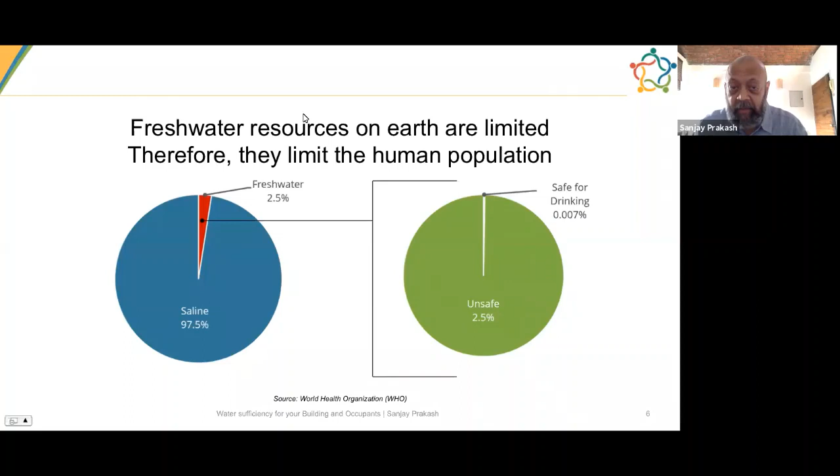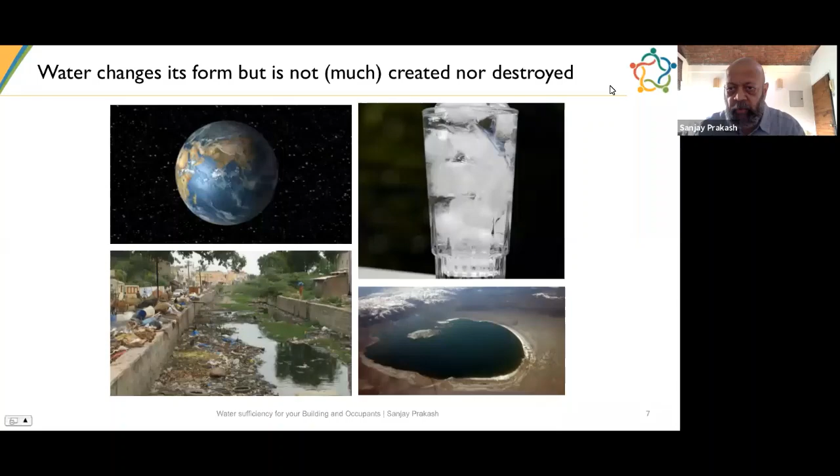The other property of water, unlike energy, or like energy, is that it changes form, but is not created nor destroyed. So it can change state, such as this ice glass you see here that's frozen, and it's there in the water vapor as well. And it can change its quality, its degree of purity as well. So, for example, you can have wastewater, and you can have a pristine pond. So you can have all kinds of water available, and most of it remains pretty much constant in the Earth's crust. It's not really created nor destroyed, it just changes form, it changes purity, it changes state. So this is the important thing about water.

If you blow up the fresh water figures, you see that most of it is locked in glaciers and ice caps, nearly 70%, and some 30% is in groundwater. So actually what we see as surface and other fresh water, rivers and lakes, is just 1.2% of that 2.5% which is fresh water on earth. And if you blow up that 1.2% also, you find that the bulk of it is in ground ice and permafrost, so it's not actually available. Ground ice is not counted in groundwater, but it can be. That's a question of definition.

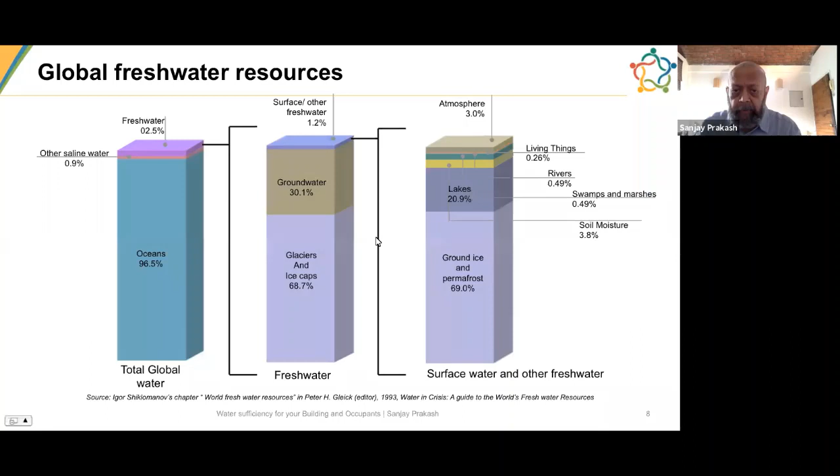Water has a geostrategic or geopolitical importance as well. For example, one of the largest rivers in Asia, the Brahmaputra and the Indus, start from pretty much the same area in China, and cross over into India in the area of Spiti. In a sense, you could say China holds the tap to India, and India in turn holds the tap to the Indus, which feeds Pakistan mainly nowadays.

And yet this is not to say that the tap can be turned off easily, because a variety of treaties, including the Indus Waters Treaty signed in 1960, have ensured that we can't really turn the tap off on Pakistan in terms of the Indus.

Also, it's impractical to turn the taps off. What would turning taps off mean? It would mean creating a huge lake on our side, large enough that all the water of the Indus continues to always be stored on this side of the border. That's not practical, neither for China nor for India. So we actually don't do it. Even during the wars we have been engaged in with Pakistan, we have never really tried to shut off the tap, as it were.

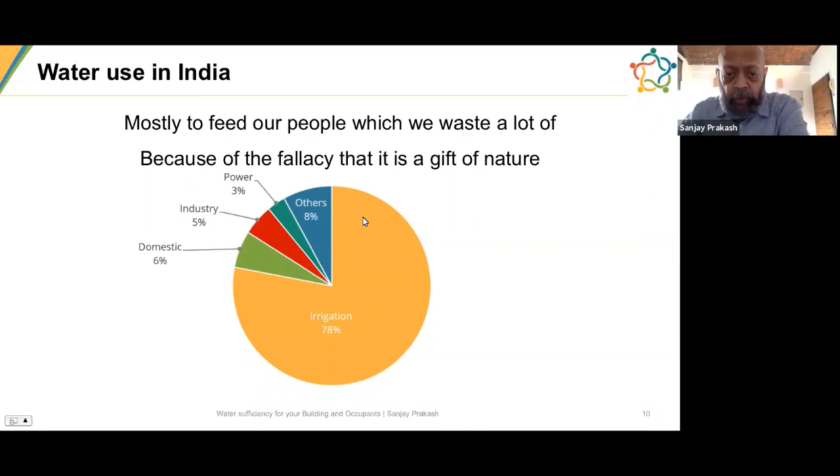is not as important as food choices are. And we actually don't understand how climate change will affect all this availability. We are saying, okay, we have a limit of 10 billion people on this earth. Will climate change cause rain to fall more often? The answer by most scientists is yes, more intensely, and therefore water will run off and not collect. The answer seems to again be yes. Will there be a greater number of droughts? The answer is again yes. So how do we reconcile these difficulties is something I would rather leave to you to find out, because the answers are complex and contradictory. It's not easy to say how climate change will affect all this availability of water, except to generally say that water scarcity will only tend to increase rather than decrease.

I have used the term groundwater. I would like to change the term now to say it's fossil water. Why is it fossil water? Because like fossil energy, coal and oil, it is stored in the ground over long periods of time. And when we draw it using pumps, we don't necessarily take our endowment of this year's water or this season's water. The only renewable water really is rain or snow, all kinds of precipitation. And therefore, if we really want to be strict about net zero water, we should be talking about only renewable water and not really fossil water.

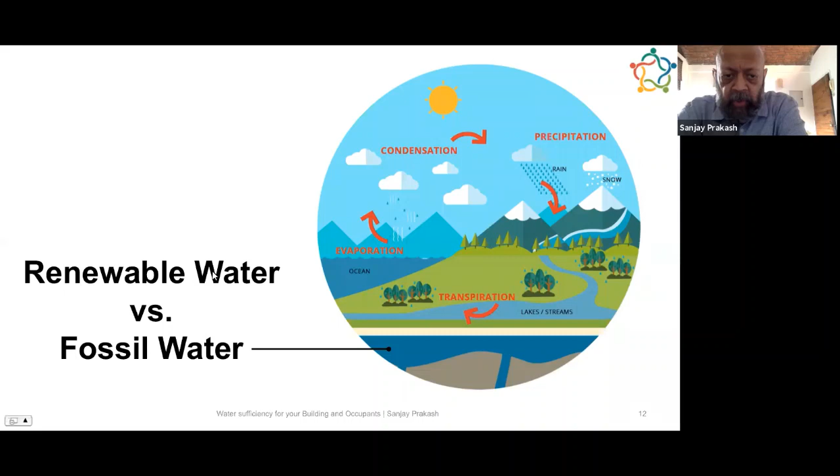Now let's come to the use side. What is the standard of use that we are supposed to be using in our domestic use. Remember, the grand total amount of fresh water used in India translates to 1600 liters per person per day. Of that, only 135 liters is used domestically, or should be. Often this 135 liters is not available. Therefore, most countries, especially most cities, especially in the north, get less than this.

So now you see, of the 135 liters, 30-40% gets into leaks. Of the remaining part, another 6 to 8% goes into post-distribution leaks. So the actual usage in urban areas is 75 to 115 liters, and this is how it's distributed: 29% drinking and so on and so forth. You can just read the whole chart. And you see how this doesn't all require the same quality. Clearly drinking requires, let's say, WHO standard water, but laundry doesn't necessarily require the same degree. Washing utensils similarly may not require the same degree.

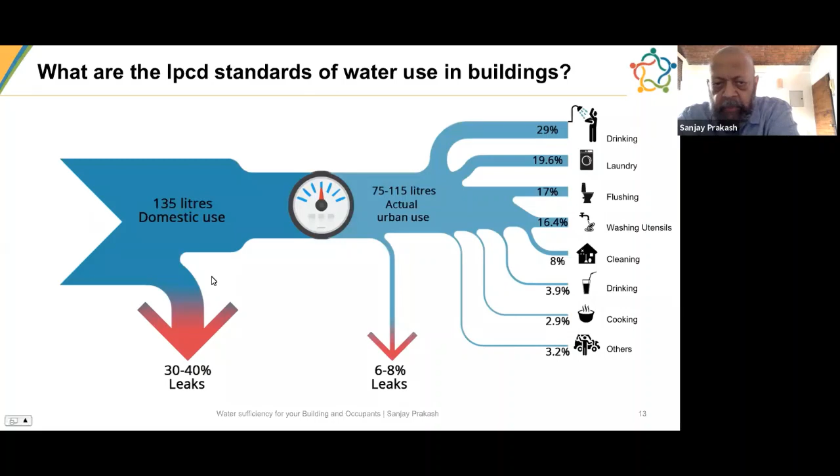And I've also discovered that some water engineers have done something quite interesting. They wash with dirtier water and they do a final rinse with clean water. So that's another way of fooling this quality parameter and getting there.

Now these are the various classes of water classified by CPCB, the Central Pollution Control Board, where class A is drinking water, class B is outdoor bathing in an organized way, class C is drinking water source after conventional treatment and disinfection, class D is propagation of wildlife and fisheries, which is different, and class E is irrigation, industrial cooling, controlled waste disposal, etc. In fact, class E can often just be treated sewage water, because each of these classes, as you can see, creates a waste stream.

So we tend to use class A water in our domestic supply pipelines in our cities. And that, to my mind, is a problem, because it means we are using the same quality of water that is drinkable as well as for flushing, which seems to me like a class C or class D usage. But anyway, this is the tradition, handed down to us, I think, from Western societies which developed cities in the 20th century. And we must remember that most Western societies are highly water positive.

In the Netherlands, for example, or in the US, water supply issues were generally sorted out in the early part of the 20th century or even the late 19th century, with projects like the Tennessee Valley Authority being big time suppliers of water. They generally don't consider water a big issue. This is one reason why in India we haven't considered water such a big issue, probably because we ape the West. Unfortunately, it's today become a political hotbed because you can't even start costing water for what its worth without creating a political upheaval, because people consider water a free gift of nature, and even farmers who use most of the water would completely rebel if water was priced.

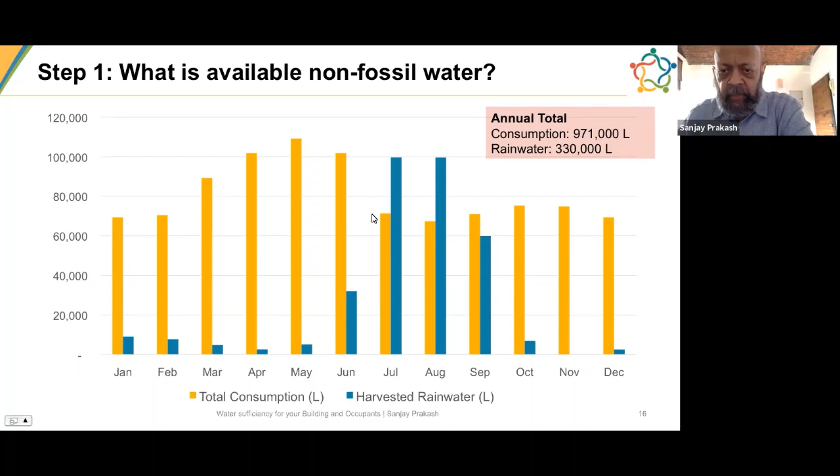Then the second step is to reduce the amount of water we use, at least domestically, not just with vegetarianism, which is of course one possibility, but you can't really assume that in your Decathlon project. You'll have to assume some kind of average food habit, whatever that means. But you can reduce it with efficient fixtures.

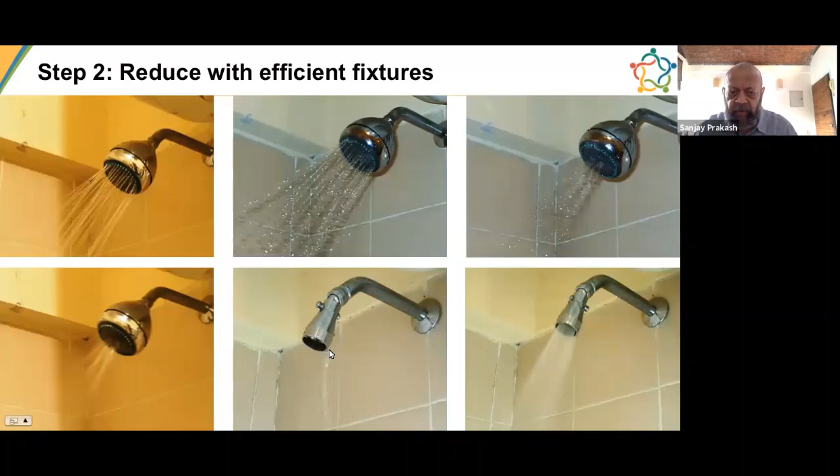Even with your eyes closed, you push this little button in, and the water reduces to a dribble so you can still do soaping, about 200 milliliters per minute. So you get much less for those few minutes you're doing the soaping. You can actually reduce even from 2.8 liters for a while. I found that using this, we could not use more than 10, 15, 20 liters in a shower, while the normal usage pattern is 30, 40 liters for a typical person.

So here is my analysis and bar charts of what I found. I did this very simply using a stopwatch and a Bisleri bottle of 1 liter to find out how many seconds it took to fill 1 liter. These 2 bars you see in groups are with an aerator, with partial opening and full opening, so every faucet has 2 settings. The soaping setting is 400 GPM, not 200 as I said, I was wrong. This is that set of thoughts that you can read at your leisure, and I think these will be available to you in the form of videos.

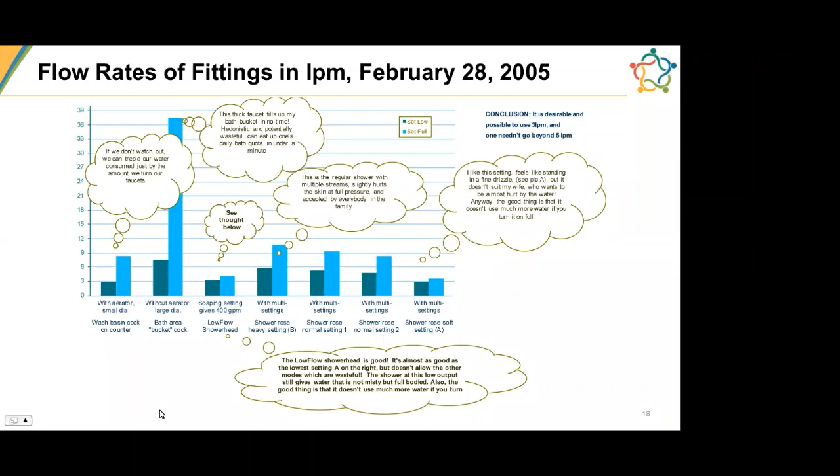So in that case, I suggest you have a look at the thoughts that came up while this bar chart was being made.

This was set low, set full, and I discovered that in the bath area that I had in the apartments, there's a horrible 38 or 37 liters of water that flowed in every minute when I set it to full. Though, when it was set to less than full, it was as little as 7 liters per minute.

That means in 1 minute, you could end up using your entire day's endowment of water. Later on, I figured the reason for this was that this was a master bedroom, and the designer must have thought people would fit a tub in it. Of course, tubs don't get easily filled up because they're 200-300 liters, and you don't want to wait more than 10 minutes to fill it up.

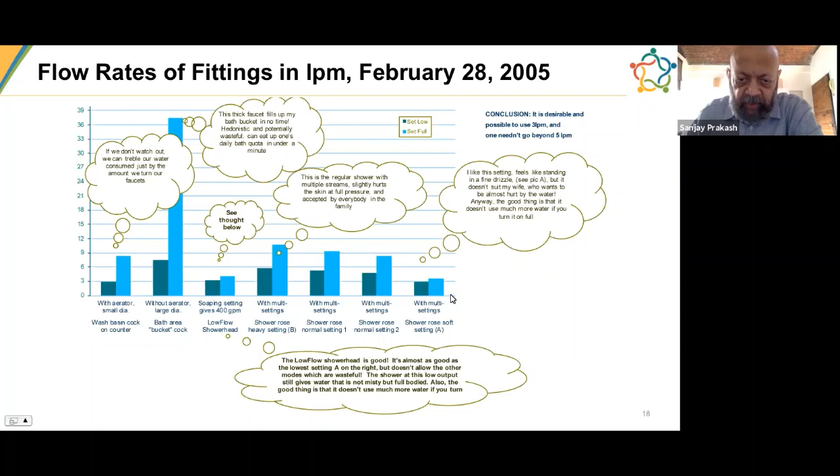So something like 37 liters per minute is what is required to fill a tub properly. That made me realize I should not desire a tub in my new house, and I did not have one. We used low flow showers only, and this was the result of the other shower settings you can have a look at.

The third step, having established some reduced use of renewable water, is to reuse that water within the network. This is a diagram from a project that we did in Bangalore.

This shows that there is rain and it comes to four places. One is the soft roofs, the roof gardens. One is the hard roof where it flows off and gets collected into a rain-fed tank. The third part goes to the sky garden, which was a special feature in that project. Then the open landscape area, it falls on, so this goes to the recharge pits and finally to the ground.

So everything later on is stored in the shallow aquifer and can be pumped back up into an underground tank, and from there it was treated and so on. If you spend enough time on this diagram, broadly rainwater was used in this project to provide most of the water, sometimes from the ground, but mostly straight away from stored rainfall harvested water, which was a very large tank.

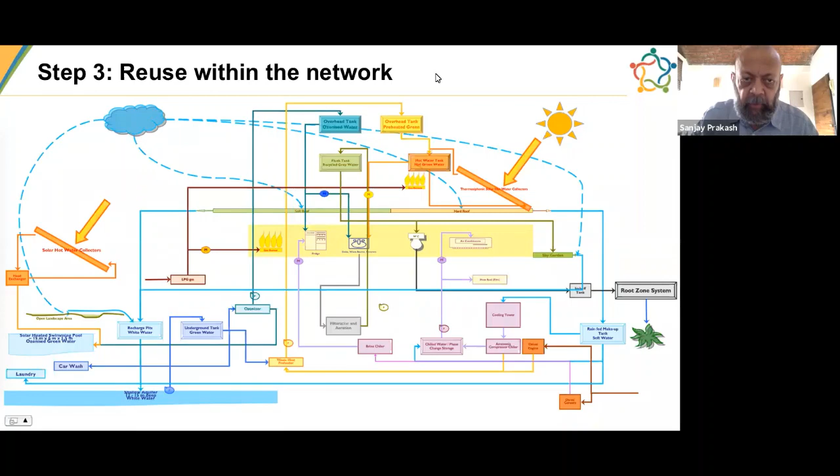I'm sorry that arrow is not very clear, but it was also used for cooling towers for the central air conditioning in that project. I think part of it was sent for flushing also, but I don't remember too well now, it was many years ago. So you see it is possible to reuse this water within the network quite strongly.

How do you treat it? So I showed you already something called a root zone system, which I was running ahead of my story.

There are two sorts of treatment systems in water. This would be called electromechanical treatment systems, that is, they run on some degree of pumps and other mechanical devices. The bulk of sewage treatment, which contains pathogens, is accomplished by aeration. You have to get sufficient air into the mix for the pathogens to be oxidized away and for the water to become clean enough so that it can be considered disinfected or good for other uses.

This is 2 methods out of 4 that we have illustrated, the most common being activated sludge on top, where you have an agitator and a set of pipes inside a large tank, which bubbles air from outside into the mass. Before and after, you can have some settling, and in all these systems the sludge comes out.

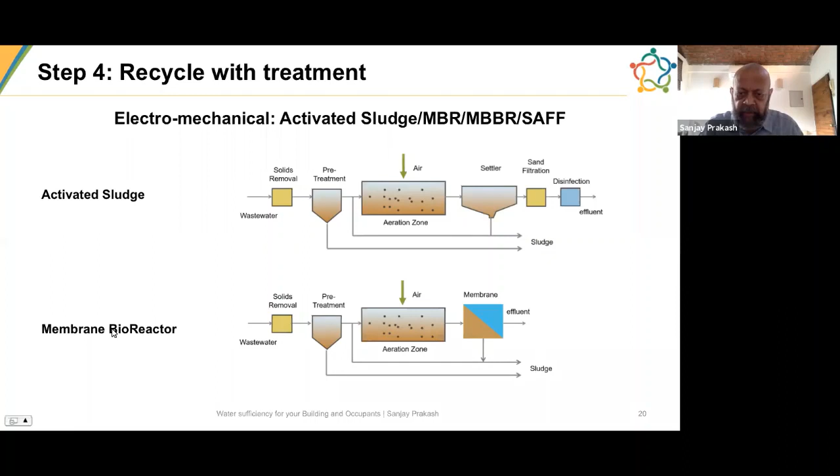Then there are natural systems, or nearly natural systems. The most common natural system, evolved in Germany, in Bremen, is called the Decentralized Wastewater Treatment system, or DEWATS. This was invented when they discovered that most traditional electromechanical sewage treatment systems in our cities were not functioning. They found some 96% or so not functioning.

The reason for that is simple: India is short of energy and electricity. So it is easiest for politicians to stop the aeration in the sewage treatment plant and supply that electricity to houses instead, because it fetches more votes. So you're stuck with a situation where sewage treatment plants, which were electromechanical, well designed, in place, maybe even well maintained in some cases, were not working. Often the reason given was that there's no electricity coming at this point, even though other lights were working.

Then there could be, oh, this was working till this morning, but it's not working right now because something's gone wrong with it. So they figured out the real reason it's not working is that we need a non-electrical system. And this is exactly what was designed by them.

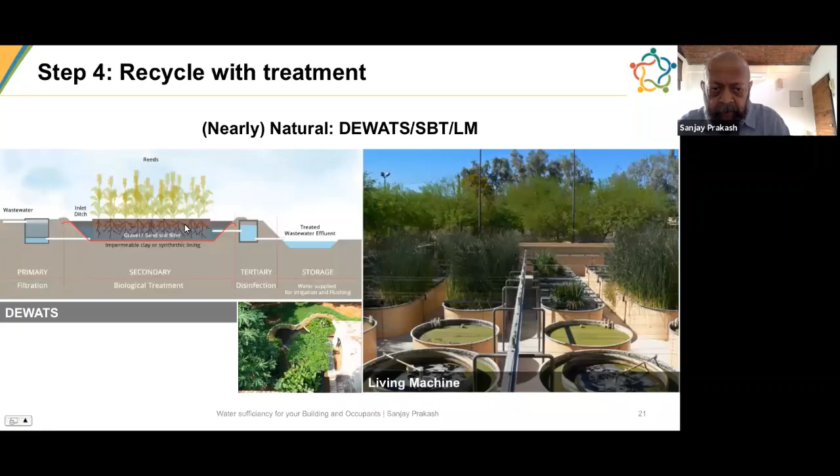Now, this is regarding recycling, but what about usage for irrigation? That itself can be dramatically reduced. The common method is the sprinkler system, which requires a lot of irrigation. We measure irrigation in terms of equivalent rain per day, where each millimeter represents 1 liter per square meter.

Sprinkler systems typically provide 5-6 liters per square meter per day, while subsoil irrigation can use zero in that sense—you clear up the grey water and pump it, or push it by gravity, into pipes so that you just moisten the subsoil. This is exposed in the photograph right now, but soil will cover it, so it will simply get wet.

That can also be accomplished similarly with drip irrigation, which does consume some water, but minuscule amounts by comparison—as little as 0.5 mm per square meter, or half a liter per square meter. It supplies droplets of water to the root of the plant, not to the whole area.

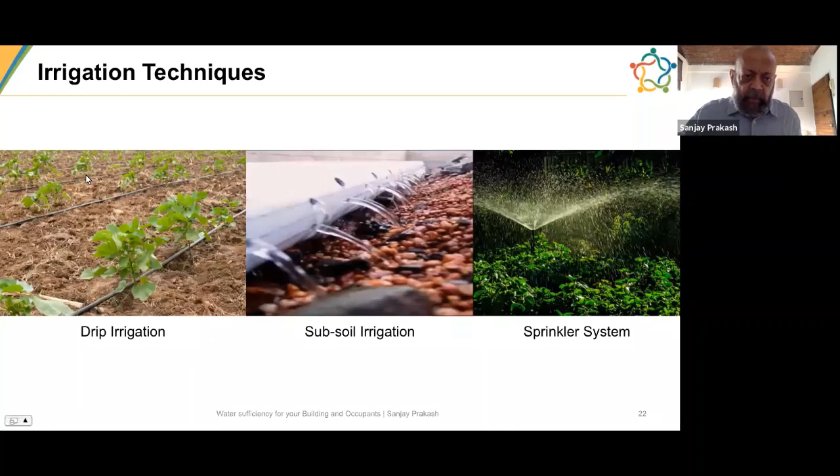Of course, this is useless for grasses—for those we use sprinkler systems or subsoil irrigation—but it's very useful for herbs and individual plants. You can also go in for xeriscaping your site. In fact, this is a technique I use quite often. Xeriscaping is simply designing something that doesn't require any irrigation at all, or almost none.

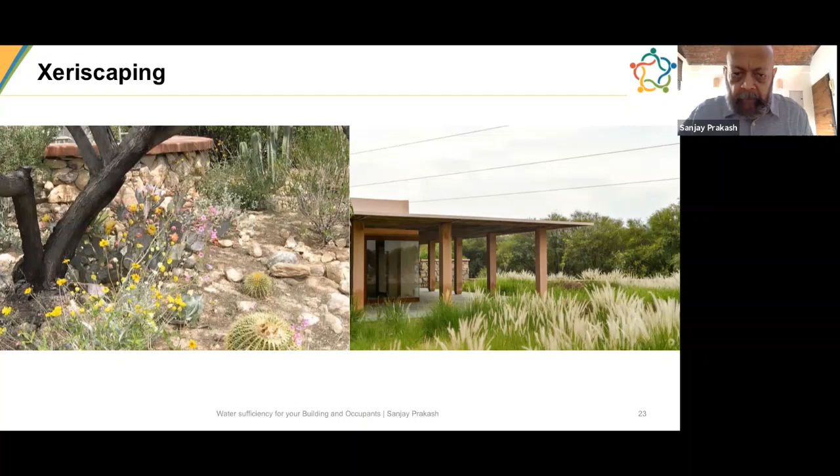I wanted to end with two case studies. One is Agilent Manesar. This is a method of computing what you can do with rainfall.

Typically the method is that you set up July to June, because July is the month in which you can say for sure that you have excess water availability, since it's a monsoon month. So you put down the rainfall you expect on average. You can get this from Wikipedia or from various other weather files on the internet. And then you see how much you can catch.

Here is the rainfall analysis on top. This is from the sky garden, this is the amount we have caught, 40%. This is from the hard roofs, 80%. This is from the soft podia, hard podia, and so on. So in a project you had so many square meters and so much runoff.

Of course, the not-utilized portion should try to be as little as possible, but sometimes it's not possible to have 0 square meters as not utilized. So here you get a rough estimation of what kind of contribution can be given by these methods.

For example, in this particular project, 40% is contributed by the hard areas on ground. That means you have to really ensure that these are kept clean. In this particular project, we even made sure these were cleaned once a day by the workmen manning this office space, because this water would be useful to collect, and it's the biggest source.

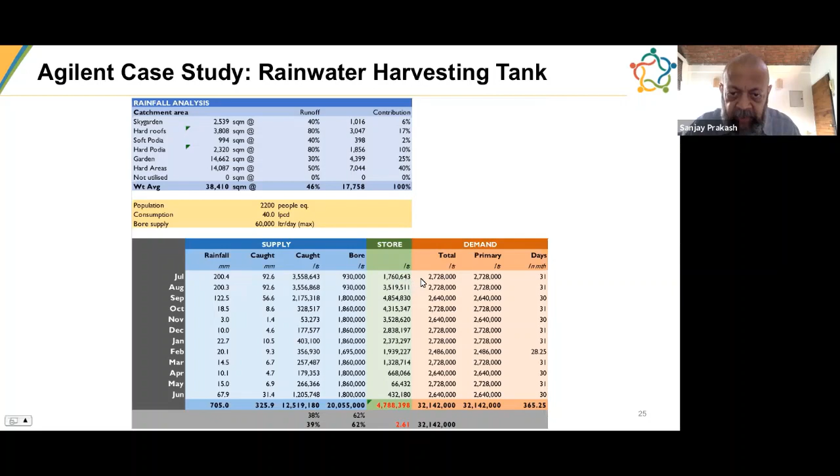In this case, it is 5 million liters, 4.788 million liters. And the largest number of this is the amount you need to store, because that's when you will get so much on that month, September, and later on you will get a reduction. This has to tie up with next month's plus and minuses to reach so much. So you get various ways of storing this rainwater.

So here we identified 4 types of uses: washing, flushing, mechanical, which mainly consisted of 2 kinds, STPs and air conditioning cooling towers, because we used cooling towers in this project since they are much more energy efficient than air cooled compressors, 40-50% more efficient.

And then there is irrigation. Mechanical is one more thing, it's car washing in this case, because a lot of people would use cars, coming in from Gurgaon. This is a project in Manesar, and they would have drivers wash the cars over the period of the day. So we wanted to cater for that because that was a real demand.

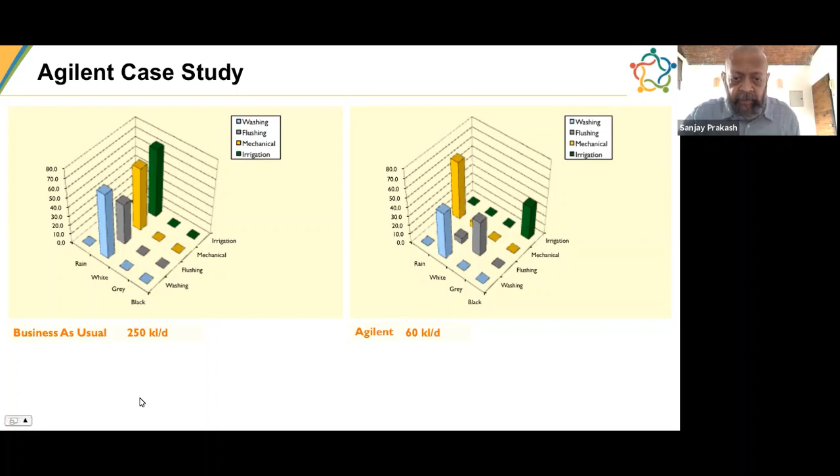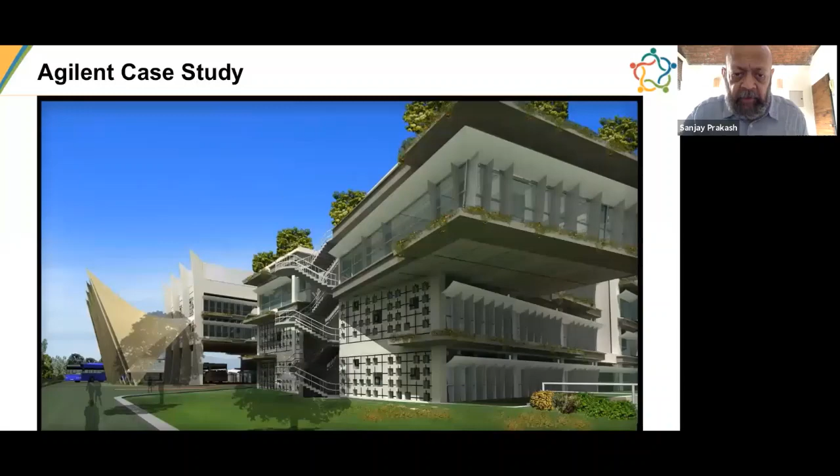This was some quick views of this building that had 1,800 people, and instead of 250 kiloliters, we are using 60 kiloliters a day for the last 15-20 years.

And so, in a sense, they are eating their own shit, but of course they are not really eating their own shit. It's been tested and treated for the right quality before being used for irrigation, but it is part of the cycle of water in this particular project. This is an overall view of the project.

The second case I want to cover is IIT Jodhpur, which is in a sense more complicated but very similar to the earlier diagram I showed you, where rainwater is a major feed. We computed that it falls on various areas in different ways and finally either goes into the sky or into the subsoil aquifer. This was a dark area, which meant we could not use it to tap groundwater.

CGWB has identified that this is so water short and it's a desert-like area that we cannot use any water pumped out of the ground. So our strategy then was to, over the decades, maybe 20, 30 years, keep on harvesting every drop of rain into the ground so that it would start growing plants.

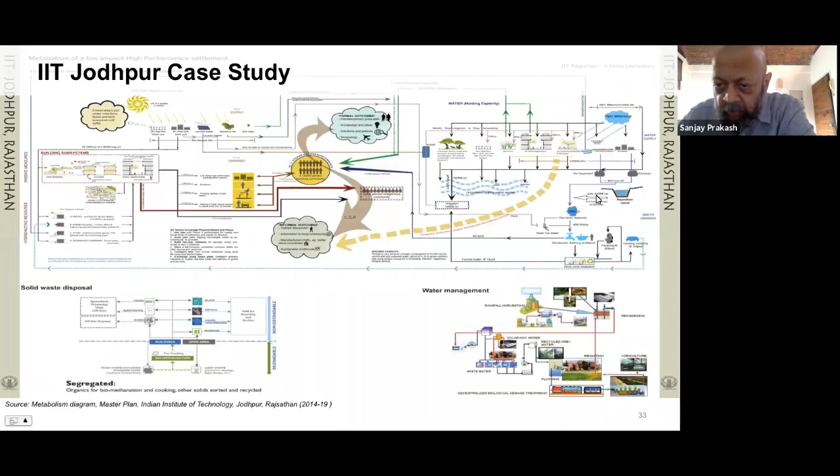Now, this is the external input that we had. We had a Rajasthan canal feed, which would feed so much per year - up to 500 megaliters per year, million liters per year. This could be used from the Rajasthan canal, which is quite far away, actually 20, 25 kilometers away. So there was a feeder specially created for IIT Jodhpur.

But our aim was to try and make this almost zero. So even though you could establish the campus, we wanted to, over a period of time, reduce the use of this to near zero.

That was the whole purpose of this entire process, in which we created a whole system of how much irrigation, how much xeriscaping, how much we could collect from the solar collectors, because solar collectors also have glass and then it's easy to harvest. There was also drip irrigation used, and we also used dew harvesting.

Dew harvesting is an interesting technique used often in deserts, where early morning you can catch the dew, especially when there are plants, which evaporates from the ground through evapotranspiration, and that can be caught in little nets which capture the dew and it becomes practically distilled water which you can use.

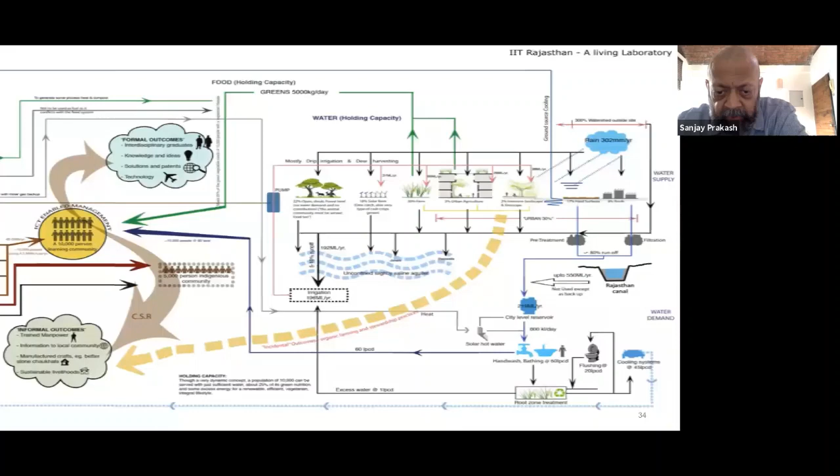This was the water cycle. You can see the rainfall harvesting on various buildings, and it had various bases for recharging. It went into air conditioning also, and basically it went into domestic use. All these domestic uses are there.

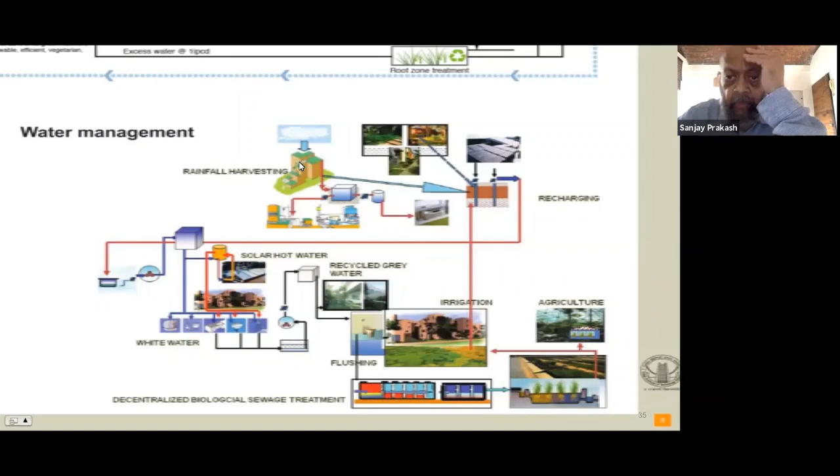Then from this it went into a simple kind of recycling plant, which was not a sewage recycling plant, but it recycled grey water, which would be used to create flushing quality water. And then flushing quality water would be recycled with a DEWATS system, or decentralized biological sewage treatment, and then used for irrigation and agriculture, and also cooling towers, which I don't know whether it's illustrated here or not. So that was the idea.

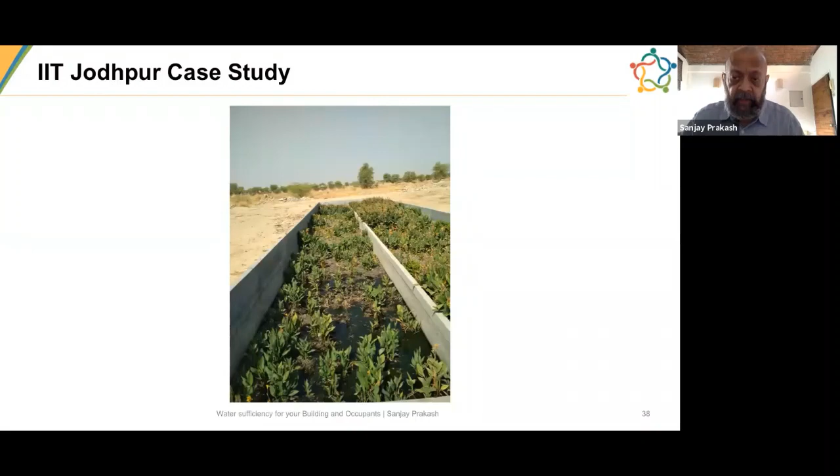DEWATS systems are very space intensive, that's really the only thing they require. They don't require energy, but they require a huge amount of space, as large as 2 square meters per person. Considering we have 10 square meters per person as a working rough approximation for offices and homes, you can see that 2 square meters is a very large proportion of that space. So that's its primary problem, that it requires campus-like spaces.

The effluent from this DEWATS system goes towards making swales. Swales are nothing but natural waterways, in this case they were created. You can see here the kind of soil that existed 5 years ago. What the swale does is it creates obstructions in the path of water flowing down, and therefore water goes into the soil. Once water goes into the soil, moisture and texture improves and plants can grow.

Here are some plants that are beginning to grow in the swale, and now it's much greener than it was when this picture was taken 4 or 5 years ago.

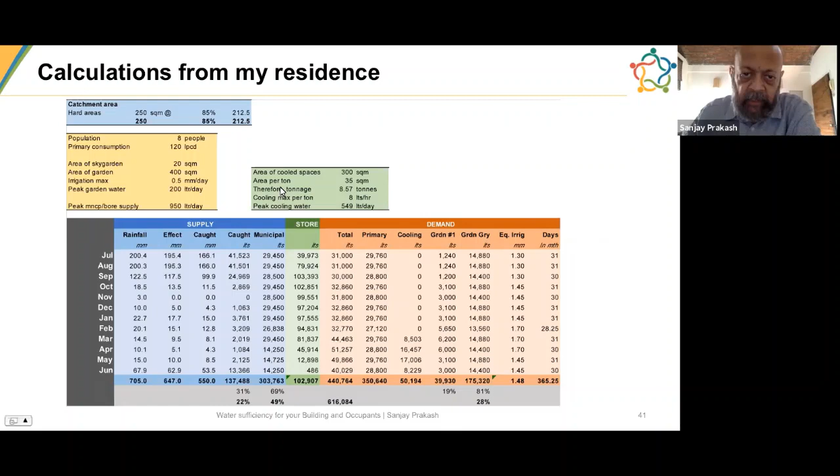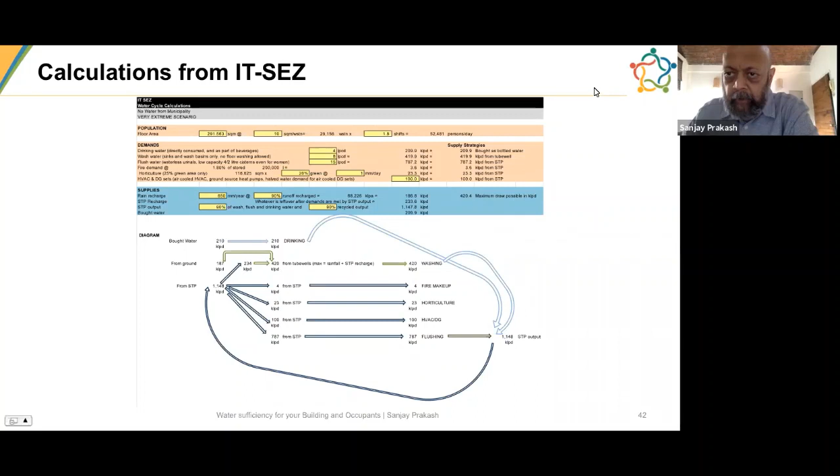So here are some other areas and calculations on the same sheet in various ways. This is the last calculation I'd like you to visit with me in the form of an Excel sheet, which I'll open and take you through. Let me escape from here, close this, and open the worksheet.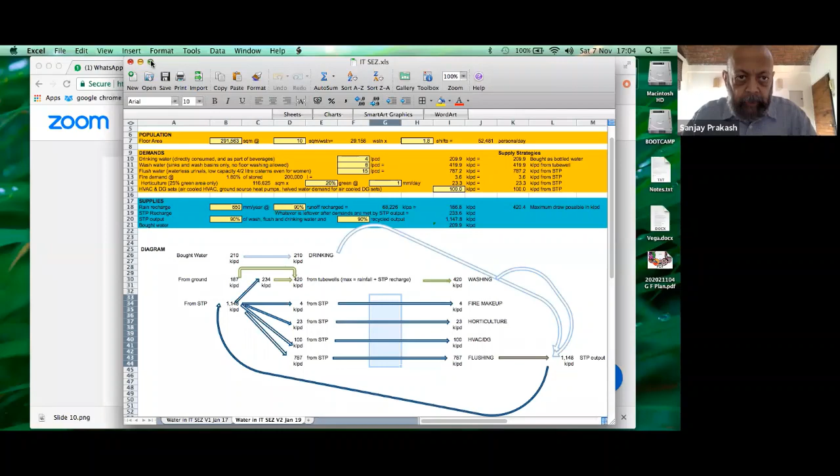So here's the same worksheet now in a more live form, to demonstrate what we did to reach this point. We had a project with so much square meter of area, 2.5 was the FAR, I think, on 30 acres. Unfortunately, with so much area given to IT parks, it means there are many people working - nearly 30,000 people. Since they would work in shifts, we figured we would require water for 52,500 people or thereabouts per day.

So we said 4 liters they'll drink as coffee, tea or water. 8 liters for washing, with no floor washing allowed, only sweeping and vacuum cleaners. And an extreme low quantity for 2-liter cisterns for flushing. So we figured we could manage with 15 liters, 8 liters and 4 liters, which totals to some 25 liters or thereabouts - 27 liters per day instead of 45 liters per day, which is the normal National Building Code standard.

This translates, when multiplied by 52,481, to so many kiloliters per day, so many kiloliters per day, and so many kiloliters per day.

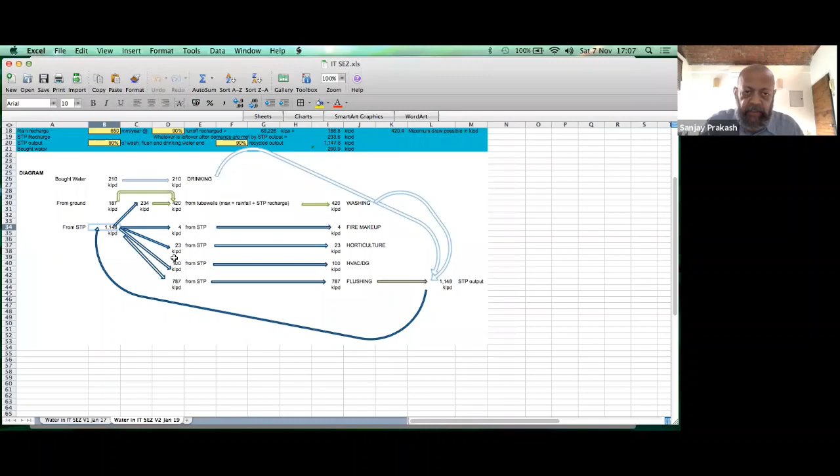And so every time we would balance this, we would have to use different strategies to get this worksheet to balance. This is something that I recommend to the organizers to be given to you as a worksheet, as well as, of course, this whole seminar will be given to you in the form of a recording. So you can have a look.

And basically, it meant that from the ground we took 187, and from STP we actually this went to the ground because we said we will recharge 234 kiloliters per day STP water, which is extra, because even when we took the fire makeup water, horticulture water, HVAC water, and flushing water, which we had to play with on those upper parts to get these right, then we still were left with 234 kiloliters per day extra, which we would recharge into the ground. Therefore, we could then draw 187 plus 234, that is 420 kiloliters per day for our washing, which is what we wanted.

So you can see that these figures are not fudged that way, but they are backward calculated and forward calculated so that they balance out. And that is the whole game of how you manage your worksheet and how you go back and forth, because you do one trial, you don't get a balance, then you go back and so on.

And we figured that we wanted to give 1 millimeter per day because the client did not want a Xeriscape type of landscape. So we said with 1 millimeter per day, and then more in the monsoon, you can manage a somewhat herbaceous garden, so that's fine. But no lawns, of course, very few lawns, maybe 10% lawns and so on.

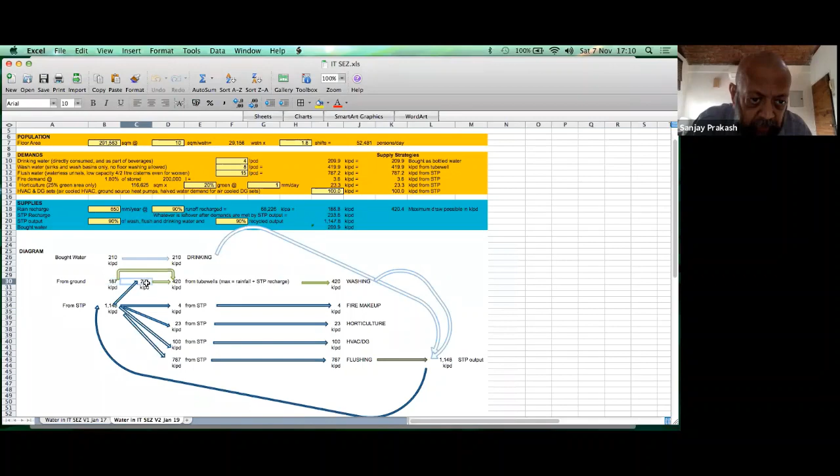And then we draw 187, and this 187 has to be less than 234, right? That's the key point. So the maximum draw possible has to be the total amount of the recharge water plus the rainwater. See, 187 was the amount of rain that fell. Here it is, rain recharge, which was, we tried to make it 100% as much as possible, 90% runoff recharge. Rain recharge, even at 650 mm, was turning out to be 187.

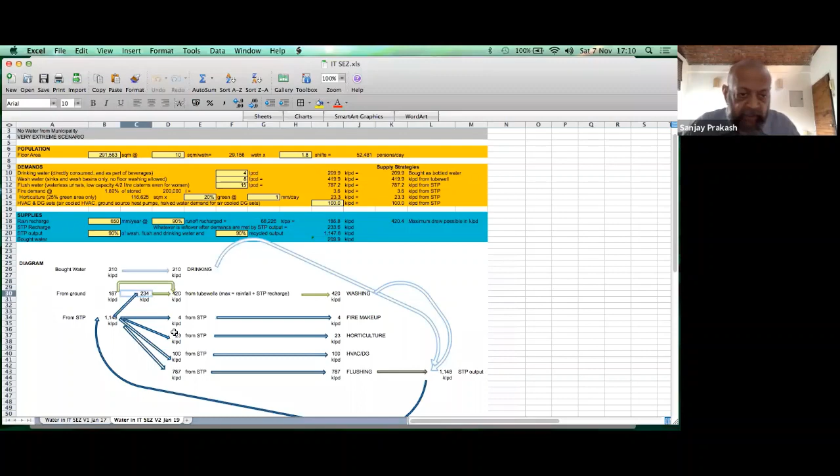So we could draw 187 from the ground, and 234 agreed that we would be drawing in dry seasons more water than fell as rain for that day, but we would be drawing much less in the monsoon where it would be getting recharged. So this is how we balanced it to a near zero or a zero water regime.

But it still meant, in this case, because of the 50,000 people that we had to cater to, that we still had to get 210 kiloliters per day, which is a very large amount. It's like 50-60 trucks of water, 70 trucks of water from outside. So we had to buy it.

So we actually started, because this is a very large SEZ project, we started working out a train of trucks to be brought from the Yamuna, the Ganga Canal, from near Meerut, where we found a source of water that is available. But this project didn't come about, so we don't know whether it would have worked or not. However, this was to just give you a flavor of how this whole business of net zero goes when you actually get your hands dirty and start working out the computations.

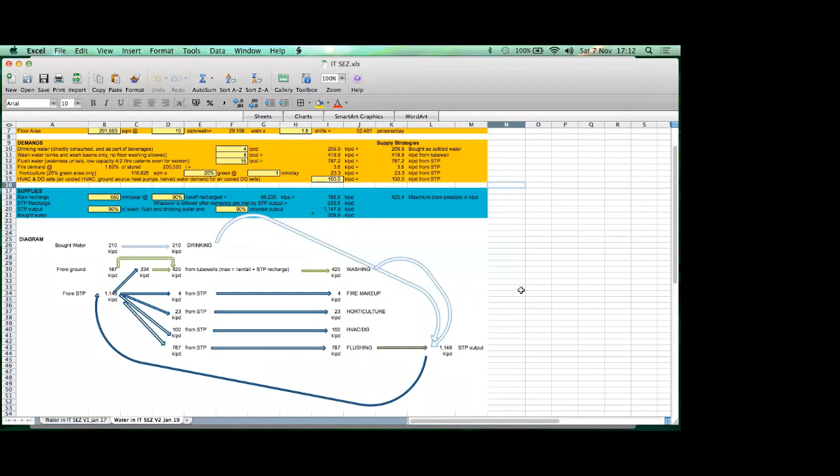The first question is how to take into account permeable concrete used in hardscapes in the water budget equation. Well, you'll have to find out from the manufacturers what the permeability is. There's another trick I didn't mention: I often take out 5% of rainfall every month from water balance calculations, not because it's a drought year, but because when surfaces receive rain, the first sporadic bits that fall don't run off, they just get absorbed. So to be conservative, I take about 5% of rainfall every month. There's no real science behind this, it's just judgment. Frankly, even the question of how much permeable concrete recharges the ground depends on whether the manufacturer is giving an honest opinion, a calibrated test report, or just marketing spiel.

Next question: does the DEWATS system work in extremely cold climates? Yes, in fact DEWATS works quite well in northern Germany, though in extreme cold climates like Sweden they put in solar heated water or other heated water to make it work. By the way, the living machine system doesn't work in cold climates at all, because it depends on mollusks and living creatures to create aeration, so it stops working when plant growth or animal culture isn't possible. But DEWATS generally works because the plants are fairly hardy - Cannas is the most common plant used. Its only real problems are not maintenance, heat or cold, but that it gets oversaturated in the monsoon and requires a good gardener, and that it requires much more space than electromechanical systems. Electromechanical systems occupy about 100 square meters and handle large volumes, but DEWATS requires 2 square meters per person.

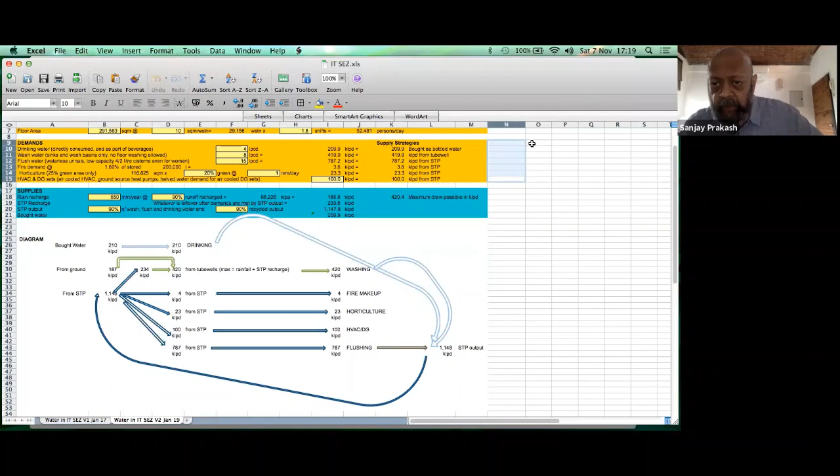The best disposal, of course, is to put it on soil, because one of the biggest things modern society does is separate us from our farmland. Traditional societies used to keep us close to our farm, which meant that the night soil we created, which was nutrients, would return to the soil directly or indirectly - either through animals or directly as night soil onto the field. But in today's system, as soon as we have sewage and WC, we create sewage which belongs to the fields, but it doesn't go back to the field.

This is actually the primary reason why we have floods and droughts. In the monsoon, we see so many parts of our country have a lot of erosion, and so many parts have floods. The reason is that by taking away nutrients from the soil and not returning them to those fields, we screw up the whole nutrient balance of our soils, and the soils no longer have the soil moisture required to not erode - so they erode in rain. The second thing is that cities put out a lot of their sewage, often untreated, into the rivers, and this causes a lot of siltation and flooding as well. These are two reasons modern society has seemingly invented, which are not necessarily the best way to go. This is one reason why a good net zero water regime would also help solve some of these side problems.

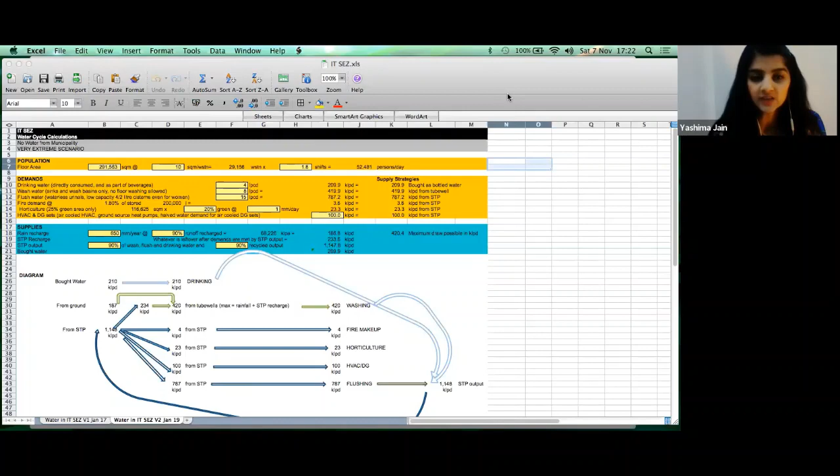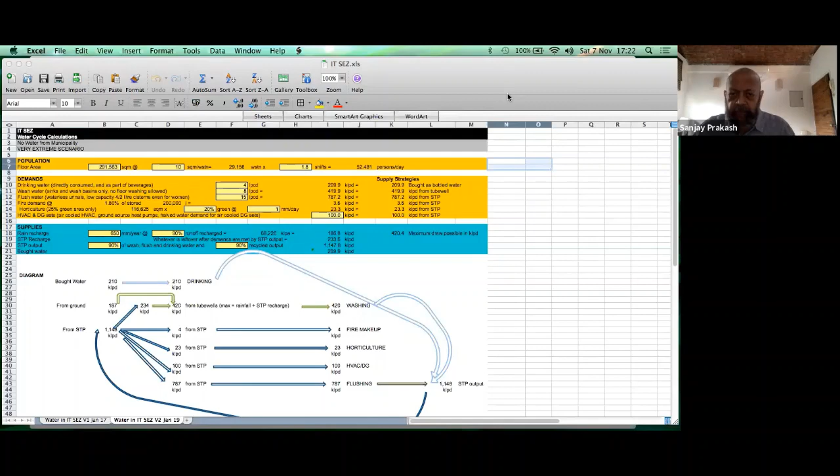Another question about the DEWATS system: what area is required for DEWATS in terms of wastewater produced in liters per day? The same amount that you would put in, right? For example, the way to calculate a DEWATS area is as follows: you take the total quantity of sewage you're putting in, which you can compute from your water consumption calculations, and you hold it for a depth of say 20 or 30 centimeters over 30 days. That's the area you require. You can divide the whole volume by 0.2 meters or 0.3 meters and get the area you require for the plant bed filter, because it has to be held for about 30 days to make it reasonably clear. I hope that answers your question.

How is it feasible to give a water pond at the end of a root zone system in a residential project? That I have to leave to you. Often if you don't have space, you can't easily give it. You will have to depend upon more energy intensive methods like AquaGuard, for example, an ultraviolet radiation machine, or ozonization, which is relatively cheaper for large volumes and not very energy intensive, but takes some energy to produce from air. It produces ozone and bubbles it into the water. So disinfection, you will agree, is necessary for producing drinking water, but how you do it, through a pond or any other way, is finally up to you.

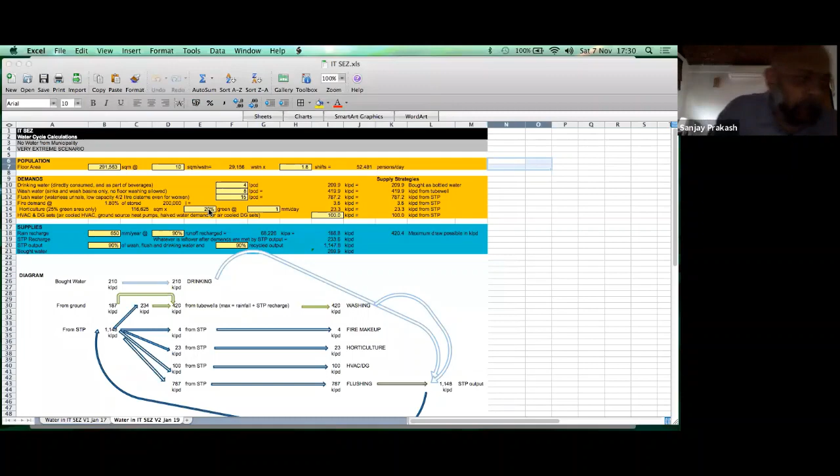This brings me to an interesting story from Germany. You might be aware that in Germany, people pay as much for their water as they pay for electricity and gas for heating. The reason is that they made a simple law requiring Germans to pay for wasted water at the same rate, essentially paying to treat wastewater to the same quality as the water they're supplied. So whatever it costs, the municipalities are supposed to charge that much. Naturally this is a very large charge, and therefore the drinking water quality in Germany is very good. The municipalities charge the same amount as if the sewage and wastewater were to be treated to drinking water quality.

Next question. What are the plants used for aeration in DEWATS and SBT systems? The most common ones are called cannas - plants which have rhizomous roots that can aerate at the root level. I'll leave you to do your own research to find out what else there are. There are quite a large number of plants, I believe, which can do this.

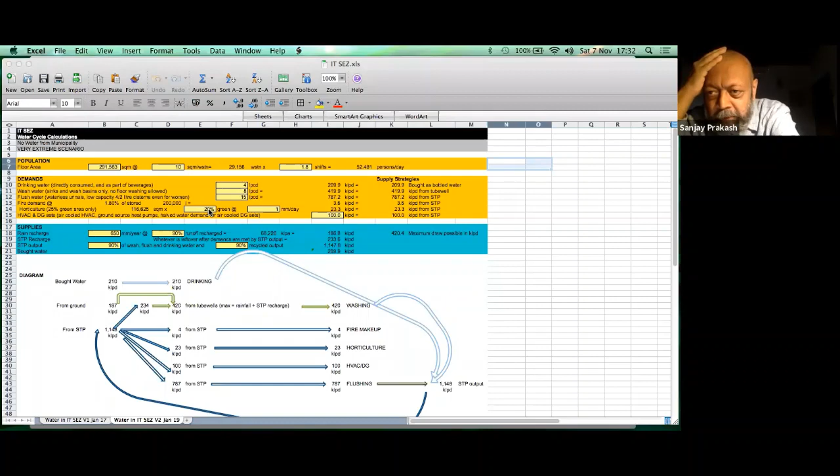Next question. If we have a sewage treatment plant at a slightly higher level on site, is there any other technique to collect it in the STP rather than pumping? I can't imagine anything - please enlighten me if you can. I don't see how water can flow from a lower level to an upper level. Basically, sewage is mostly water - 99.9% is water, only 0.1% is sludge.

Next question. Let's take this one up. What should be the water management system when there is too much rainfall annually and the groundwater table is high, but we cannot dispose of the water off-site to accomplish net zero characteristics? This is an unusual case because you're saying you actually have too much water. You will have to find some interesting ways of dealing with it, including evaporating it, though if there's so much water it's likely a very humid climate, so not much will evaporate. I really have no answer to this one.

Following that, we had this other question: if we choose to store water, won't storage also be a big issue? How much space would a 1 lakh liter water storage tank take up? My 1 lakh liter storage tank in the backyard takes up a space of 6 meters by 6 meters by 5 meters deep - that's more than 100 cubic meters if you multiply those numbers, but the rest is taken up by the lining on the walls and so forth. Its roof, which is the important component, is supported with piers of brick every 2 meters, so that I could create the roof out of stone and not concrete.

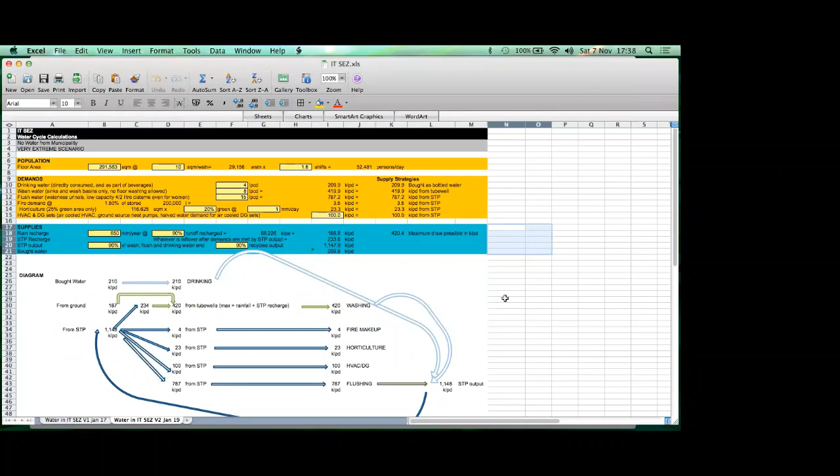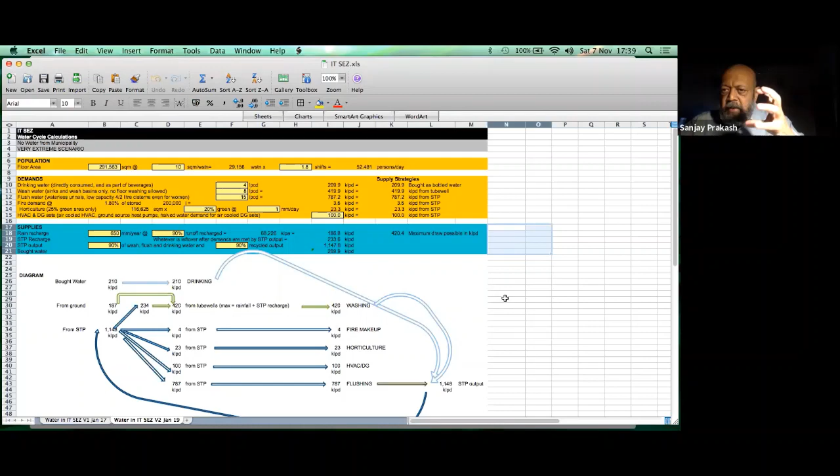Another question: can we use recycled grey water for fire water storage? Yes, it was not allowed earlier, but fire water storage doesn't take up too much water, as you'll notice from my IT-SEZ calculations. Even if white water, municipal water in this case, comes in, typically fire water storage is a one-time storage. When a fire happens, that is when it gets used. But on a daily basis, you only need to make up whatever evaporates from it, whatever it loses. So that is much less, and you'll see from our IT-SEZ calculation that despite the other numbers being very large, the fire makeup is a very small quantity. So fire doesn't have to be a big issue, because you store a lot, and the overflow of that then goes into the rest of the uses. That's typical of all fire tanks and the way they are.

But surely you could use recycled water there. You'll have to find out what the TDS, the BOD and the COD of the recycled water is before making that decision.

Another question, I think this is following what Prasad said: if recycled water is used for groundwater recharge, what should be done to improve its quality? It should be treated before it's recharged, so you'll have to find out what is an acceptable level of treatment. In an extreme case, one should make it equivalent of drinking or washing water, but I don't think we would need to go that far. As long as we can get this to be pathogen free and TDS free, I would accept it if I was in the jury to be used for groundwater recharge. Ground itself can filter a lot of TDS and even to some extent the amount of pathogens in the water, so there is that too.

Now somebody has asked, water pumps make a lot of energy go to waste. Can we draw water without electrical energy? I don't know how to.

You can do it with manual energy, but I believe you can only do it from 30, 40, 60 feet, not more. I've actually designed a building many years ago in which we used foot pumps to pump water. We used to collect the rain there, since there was no rain connection, no water connection, no electricity. It was a very wild, cold area, so we would harvest the snow and rain and put it in underground tanks that were part of the foundations of the buildings we were designing. From those foundation tanks, we needed to pump water up daily for the day's use. Since it was some kind of resort, I figured the best option would be foot pumps, like cycles, so we would encourage guests to cycle a bit, and in the bargain, in 5 minutes they would pump up one day's use of water into the overhead tanks. So yes, you could do it that way, but I doubt that kind of thing is manageable in most situations.

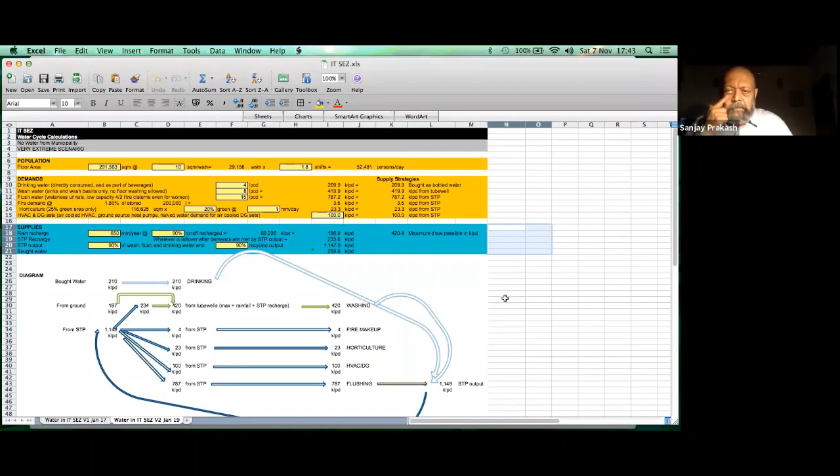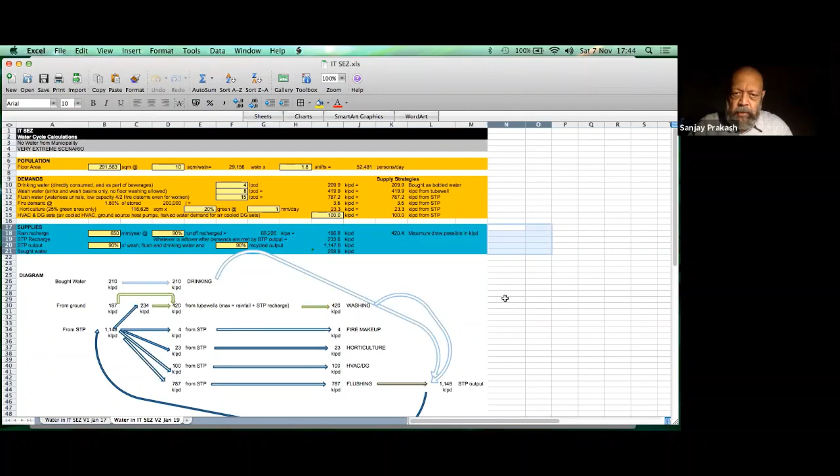How efficient is the root zone system at an individual housing level? Well, how efficient or efficacious is up to you to work out, if there is a shortage of space. In individual housing in Auroville, you'll find practically every other house has a DEWATS system in operation, partly because Auroville Science Center got a grant and training in the implementation of DEWATS systems. This comes from an organization centered in Bangalore - dissemination of DEWATS, something, if you Google it you'll find it. What it means is that I've noticed how in Auroville they actually dig up portions of their individual site to reach a lower and lower level, so that the polishing pond, because they have very little electricity, can actually sometimes be in a bit of a hollow, with steps going down to it. It's almost like a kund. So it can be done, but it has these issues.